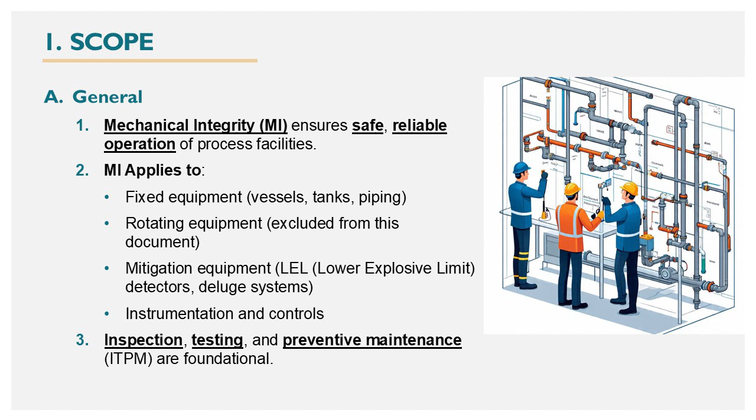The second scope is mechanical integrity or MI applies to fixed equipment, rotating equipment, mitigation equipment such as LEL or lower explosive limit detectors, deluge systems, gas detectors, instrumentation and controls.

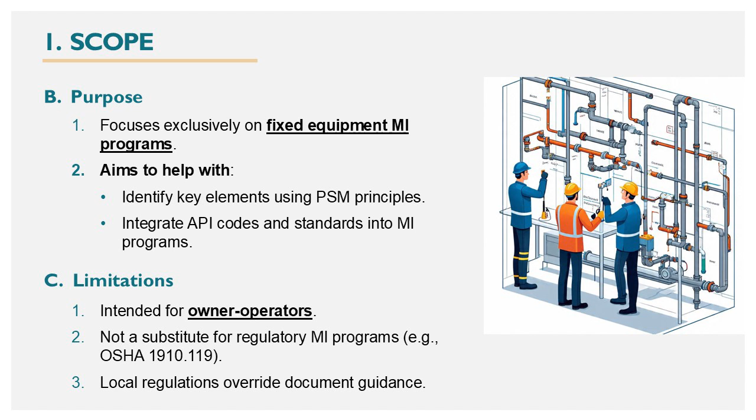Agenda 2, Fixed equipment in a mechanical integrity or MI program. Number A, when applying mechanical integrity or MI to pressure vessels, there are 4 things to be considered, but not limited to the following. Number 1 is construction code of the equipment.

Number 2 is process hazards involved. Number 3 is risk of loss of containment. And number 4 is potential secondary consequences of equipment failure.

Number B, equipment types of fixed equipment covered in an MI program are the following: pressure vessels, storage tanks, piping and pipelines, pressure relief devices or PRDs, fired equipment, critical utility systems, hybrid equipment or fixed other types, and finally peripheral fixed equipment.

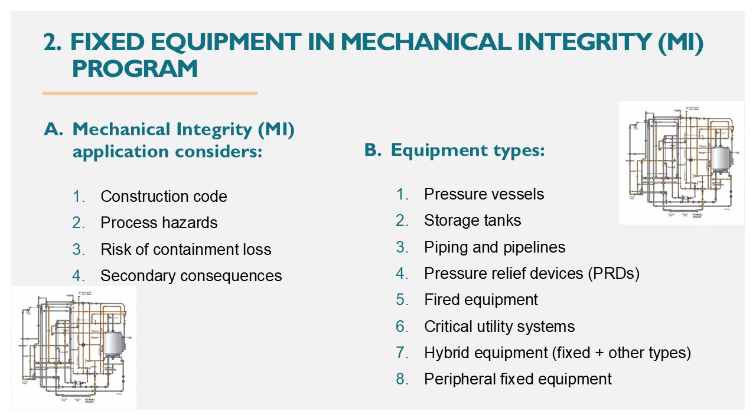Agenda 3, Written Guidance Overview. Number A, generally, in written guidance of mechanical integrity or MI, shall consider the following.

Owner-operators are responsible for developing, documenting, implementing, executing and assessing written procedures for MI throughout the equipment life cycle. Written procedures are essential for an effective MI management system, influenced by industry regulations and standards relevant to the assets used.

Number B, the documentation hierarchy framework includes: Level 1, sometimes called corporate documentations, pertaining to policies, processes, and systems. Level 2, sometimes called cross-site documentations, pertaining to programs. Level 3, also sometimes called site-specific documentations, pertaining to practices and guidelines.

Then another group is task-specific activities pertaining to detailed procedures. For all those documentation, it shall be defined by owner-operators which procedures are needed to meet MI program requirements.

Number C, use of consistent terminology is important to distinguish between required and optional activities. A structured framework shall enable the following.

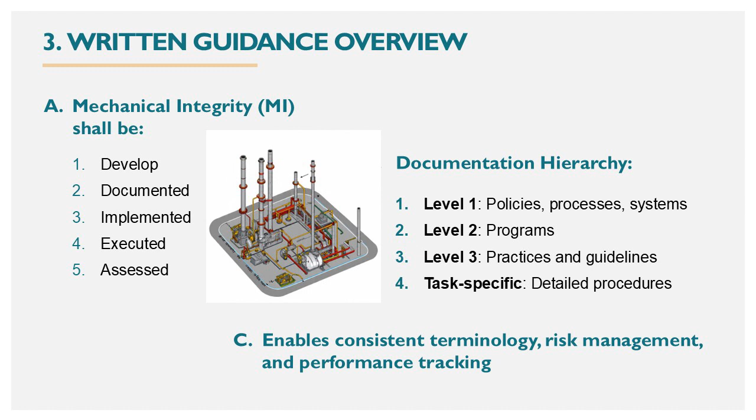The first is clear planning and execution of MI activities across all organizational levels. The second is standardized implementation of risk management strategies. The third is flexibility to address various types and sources of risk. And the fourth is performance measurement and continuous improvement.

Agenda 4, policies, processes, and systems. These elements of a fixed equipment mechanical integrity or FEMI program outline how an organization meets business and regulatory requirements for mechanical integrity or MI.

Often referred to as corporate or Level 1 documents in large organizations. Key components include: Number A, define organizational structure, defines roles, responsibilities, and expectations for MI personnel, ensures independence for those responsible for equipment integrity to raise concerns freely. Some regulations require separation between inspection and operations.

Number B, contractor and supplier expectations, sets quality standards for services, materials and asset quality. Number C, departmental workflows, describes how departments interact and communicate internally and with external agencies.

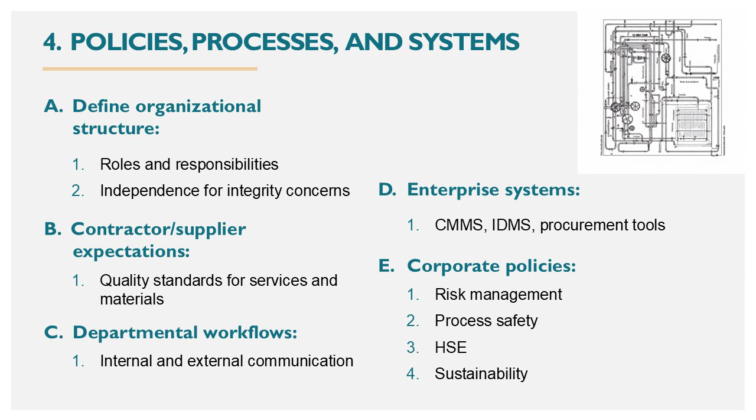Number D, enterprise systems management, covers systems like CMMS or computerized maintenance management system, IDMS or inspection data management system, and procurement tools. Number E, corporate policies, includes policies for system implementation, maintenance, and upgrades. These corporate policies are risk management, process safety, health, safety, environment, and security or HSE, and sustainability.

Agenda 5, Fixed Equipment Mechanical Integrity or FEMI programs. Program documents provide more detail under the broader policies and systems, often referred to as cross-site or Level 2 documents in large organizations, to support Level 1 documents which covered policies, process and systems.

Examples include, number 1 is Detailed Mechanical Integrity or MI programs, for fixed equipment, rotating equipment, electrical systems, and process controls/interlocks.

Number 2 is Supporting programs. It is to ensure mechanical integrity or MI performance is sustainable. Examples: Management of Change or MOC, Process Safety Information or PSI, Operating Procedures, Project Management, Procurement, Emergency Response, Corrosion Management, Condition Monitoring, and Inspection.

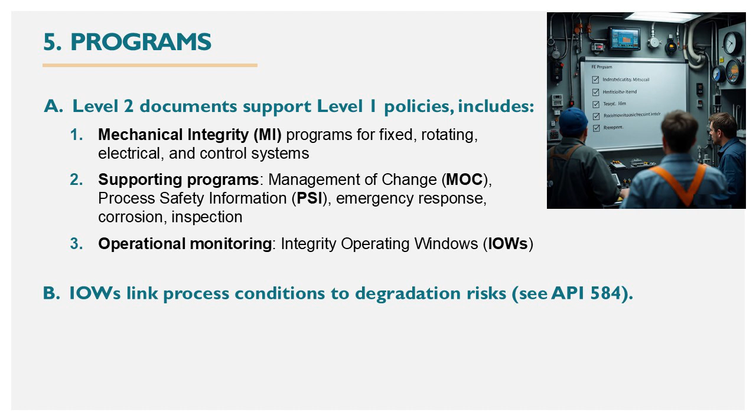Number 3 is Operational Monitoring Programs, to monitor and control process parameters, especially important where integrity operating windows or IOWs are defined. These programs should integrate with mechanical integrity or MI systems. See API 584 for integrity operating windows guidance.

Agenda 6, Fixed Equipment Mechanical Integrity or FEMI procedures. Generally, this procedure is sometimes called site-specific or Level 3 documents. It provides detailed practices and guidelines under the mechanical integrity or MI programs.

Procedure number A, inspection, testing, and preventive maintenance or ITPM procedures. This ITPM procedure outlines strategies for inspecting and maintaining fixed equipment. It aims to detect failure modes and damage mechanisms affecting integrity.

Procedure number B, administrative procedures. This describes how MI-related work is planned, scheduled, and documented. Examples of administrative procedures include, first, using CMMS or computerized maintenance management system, and IDMS or inspection data management systems.

The second is managing work orders. The third is maintaining equipment records and reporting equipment failures.

Procedure number C, safe work practices. This procedure is to ensure personnel's safety during MI activities. For examples, personal protective equipment or PPE requirements, lockout tagout or LOTO, hot work permits, confined space entry and line break procedures.

Procedure number D, general quality assurance or QA procedures. This QA procedure is to ensure equipment meets design and performance standards. This QA procedure covers the following: supplier and contractor selection or audits, project engineering, and equipment construction and maintenance.

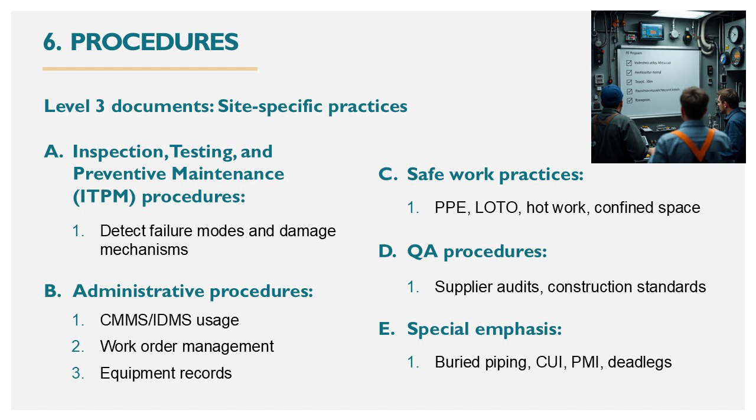Procedure number E, special emphasis program procedures. This procedure focuses on high-risk or problematic areas needing extra attention. For examples, buried piping inspection, corrosion under insulation and fireproofing or CUI and CUF, positive material identification or PMI, dead leg inspection and location of specific damage, refer to API 571.

Agenda 7, Detailed Work Instructions. Generally, this detailed work instruction is a task-specific procedure that guides step-by-step execution. It is to ensure activities are done safely, consistently, and meet program standards.

Detailed Work Instructions number A is Core Maintenance Skill Procedures, for examples, Welding Procedure Specifications or WPS, and Mechanical Joint Assemblies such as ASME PCC-1.

Detailed Work Instructions number B is Inspection, Testing, and Preventive Maintenance or ITPM Task Instructions, for examples, cleaning heat exchanger bundles, chemical cleaning of piping, NDE or inspection techniques, visual inspection of storage tanks, relief valve testing, pressure or leak testing, and procedures for changes in operating status.

Detailed Work Instructions number C is Repair or Replacement Procedures, for examples, welding repairs on piping and vessels, relief valve rebuilds, plugging heat exchanger tubes, and temporary and insulation repairs.

Detailed work instructions number D is troubleshooting guidelines, for examples, root cause analysis flowcharts, corrosion control documents or CCDs, and manufacturer maintenance guides.

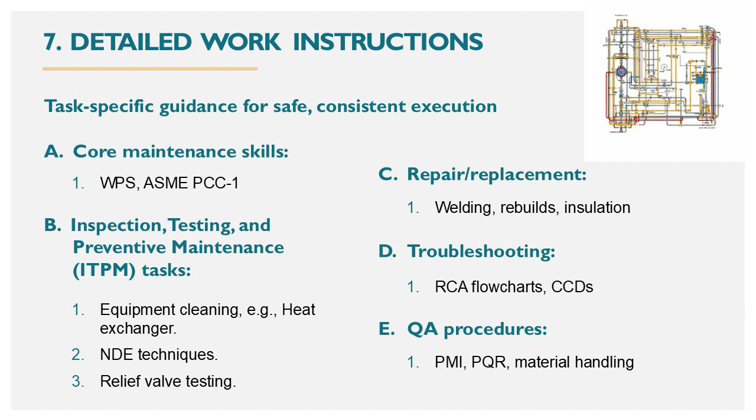Detailed work instructions number E is specific quality assurance procedures, for examples, equipment or material purchasing, warehouse material handling, positive material identification or PMI, and welding procedure qualification records or PQR.

Agenda 8, Training and Qualifications Summary. Number A, in general overview, many roles are involved in mechanical integrity programs. Both employees and contractors must be trained and qualified for their specific roles, and these roles are important throughout the equipment's life cycle. Number B is, contractors and employees must be qualified and experienced.

Practical experience is just as important as formal qualifications. Training programs help keep skills current and adapt to changes. Some certifications require ongoing learning and documentation, and some companies test contractors' skills themselves, especially for tasks like NDE or non-destructive examination.

Number C is local process and safety training. Workers must be trained on the specific units they work in, including understanding processes, damage risks, and hazards. Regular refresher training is recommended. Safety programs should keep workers alert, aware of risks, and ready for emergencies, and training is updated as conditions change.

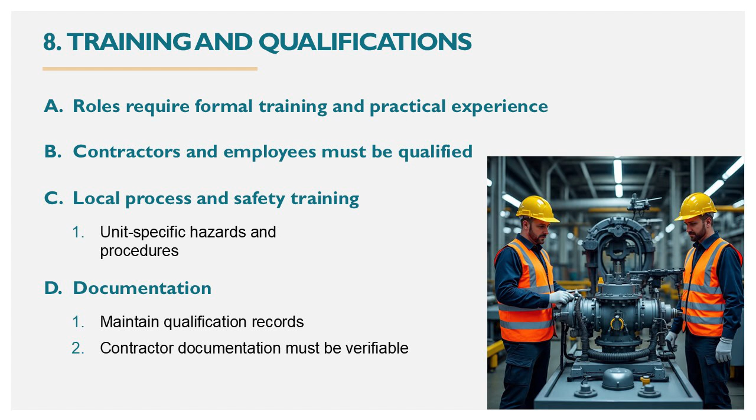Number D is documentation. Companies must keep records of their employees' qualifications. They must also ensure contractors maintain and provide documentation when needed.

Agenda 9, Inspection and Testing. Number A, this is purposed to assess condition throughout lifecycle. Inspections and tests are done to check the condition of fixed equipment throughout its life. A system must be in place to schedule and complete inspections, tests, and preventive maintenance or ITPM to ensure mechanical integrity.

Number B, inspections, tests, and preventive maintenance, or ITPM tasks. ITPM tasks vary based on equipment type, conditions, and regulations. Common tasks include visual inspections, non-destructive examinations or NDE, tests such as hydrotests, leak tests, and preventive maintenance such as coating or insulation repair. The type of equipment determines which codes or standards apply.

Number C, methodology and frequency. Inspection frequency depends on equipment type, damage risks, and regulatory requirements. Three common inspection methods are: time-based, an inspection and testing scheduled using regular intervals; condition-based, an inspection and testing scheduled based on equipment condition; and risk-based, an inspection and testing scheduled based on risk assessment. Different methods may be used for different equipment types. If inspections are delayed, a deferral process must be followed, documenting reason for delay, approval, and new due date.

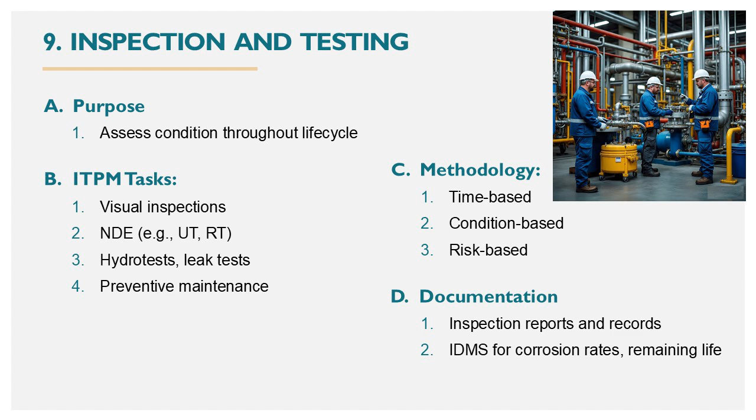Inspection records may also include design and construction info, repair and modification history, fitness for service assessments, and corrosion management data. Agenda 10, Deficiency Management.

Number A, types of deficiencies. Type number 1 is equipment deficiencies, physical issues like damage or wear that exceed acceptable limits or don't meet specifications. Type number 2 is program deficiencies, problems in the MI program itself, such as missed inspections, unqualified personnel, or poor documentation. Deficiency management, Number B is equipment deficiency management process.

Process number 1 is tracking and managing a system, like CMMS or IDMS, used to track deficiencies and ensure repairs are completed. Each deficiency is documented, prioritized, and monitored until resolved.

Process number 2 is identifying equipment deficiencies. Found during inspections, engineering studies, incident investigations, or operator rounds, some issues need expert review to confirm if they are actual deficiencies. Deficiencies can be objective or measurable, such as wall thickness below limit. Deficiencies also can be subjective or based on judgment, such as unusual corrosion pattern.

Process number 3 is following up on equipment deficiencies. Number A, following up by prioritizing and resolving. Follow-up by prioritization is based on risk, severity, repair time, and regulations. Follow-up actions may include repairs such as welding and coating, further inspections, and engineering evaluations such as fitness for service. Follow-up by resolving or temporary repairs, like clamps, must be tracked and replaced before expiration.

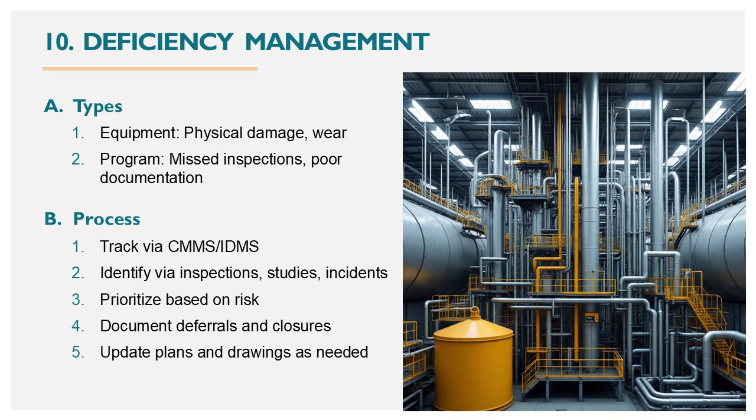Process number 4 is equipment deficiency documentation of closure documentation. All completed actions must be documented clearly. If a repair is no longer needed, a written justification is required. Updates to drawings, inspection plans, and IDMS may be necessary.

Program Deficiency Management, Number A. This program covers the systemic issues that weaken the MI program, such as overdue inspections, poor documentation, inadequate training or testing, missing safety information, weak corrosion or maintenance planning, and poor communication or follow-up.

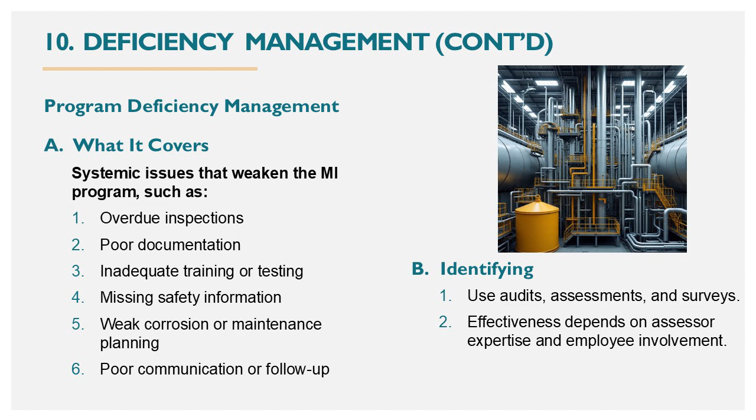Number B, identifying program deficiencies. Use audits, assessments, and surveys. Effectiveness depends on assessor expertise and employee involvement.

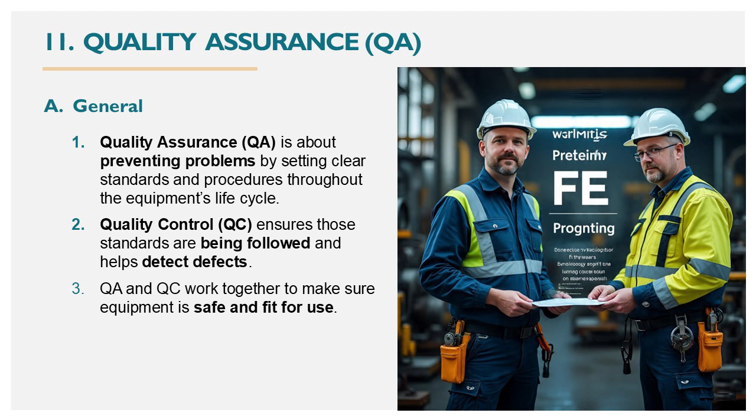Agenda 11, Quality Assurance, or QA. Number A, general overview of QA. Quality assurance, or QA, is about preventing problems by setting clear standards and procedures throughout the equipment's life cycle. Quality control, or QC, ensures those standards are being followed and helps detect defects. QA and QC work together to make sure equipment is safe and fit for use.

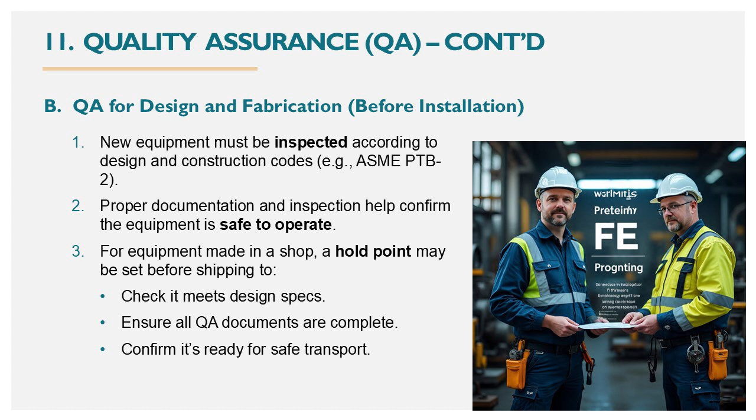Number B, QA for design and fabrication, or before installation. Number 1, new equipment must be inspected according to design and construction codes such as ASME PTB-2. Number 2, proper documentation and inspection help confirm the equipment is safe to operate. Number 3, for equipment made in a shop, a hold point may be set before shipping to check it meets design specs. Ensure all QA documents are complete. Confirm it's ready for safe transport.

Number C, QA for receiving, storage, and retrieval.

QA procedures help ensure equipment is correctly received, matches the order, is undamaged, and is properly stored, such as dry conditions for welding materials, isolated to avoid contamination, accurately retrieved for installation with the right items, and handled properly.

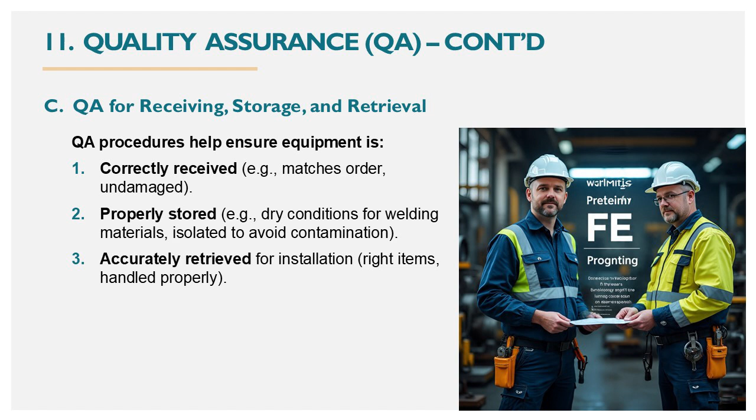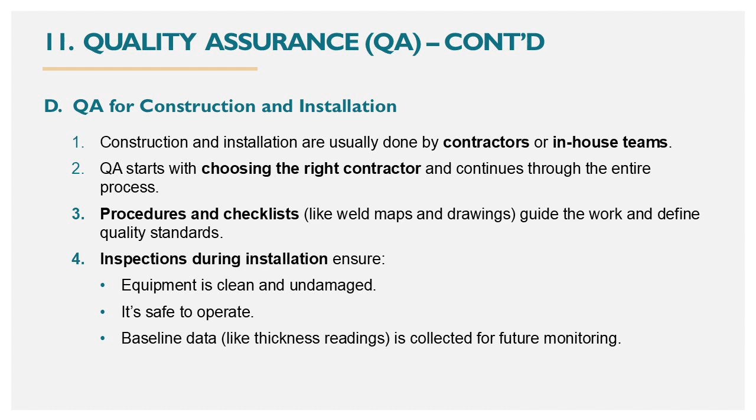D. QA for construction and installation includes: construction and installation are usually done by contractors or in-house teams. QA starts with choosing the right contractor and continues through the entire process. Procedures and checklists, like weld maps and drawings, guide the work and define quality standards. Inspections during installation ensure equipment is clean, undamaged, and safe to operate. Baseline data, like thickness readings, is collected for future monitoring.

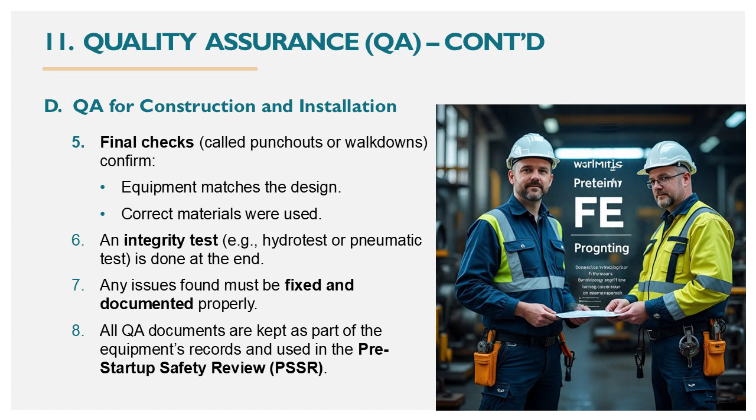Final checks, called punch-outs or walk-downs, confirm equipment matches the design and correct materials were used. An integrity test such as hydrotest or pneumatic test is done at the end. Any issues found must be fixed and documented properly. All QA documents are kept as part of the equipment's records and used in the pre-startup safety review, or PSSR.

E. QA for in-service inspections, repairs, alterations, and re-rating. QA continues during repairs, inspections, and modifications. Contractor selection and NDE equipment calibration are important.

Repairs must follow the original design code or a relevant repair code, with a repair plan made by a qualified inspector or engineer. All work must be authorized and approved as per the code. An inspection and test plan is created for each repair or alteration. All activities are fully documented to ensure the equipment remains safe and compliant.

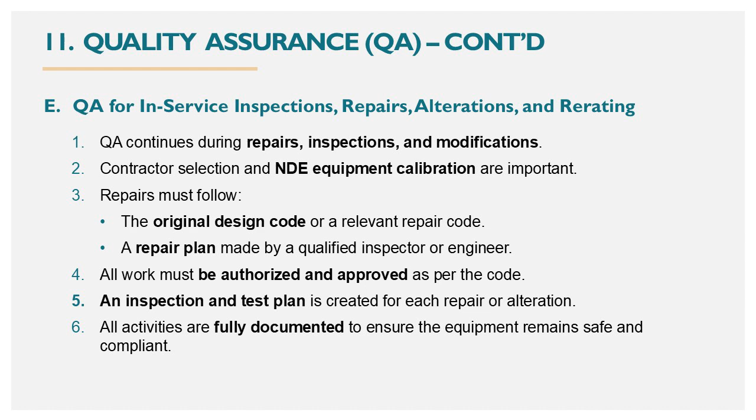F. QA for temporary installations and repairs. Temporary repairs, like lap patches or sleeves, follow different standards than permanent ones. ASME PCC 2 provides guidance for these. Companies must have a clear policy to manage temporary fixes and avoid serious risks. This policy should be part of the Management of Change, or MOC, process.

Check if operating conditions or procedures need updates, and ensure staff are informed of changes. Temporary repairs usually have an expiration date and must be reviewed or replaced before that date.

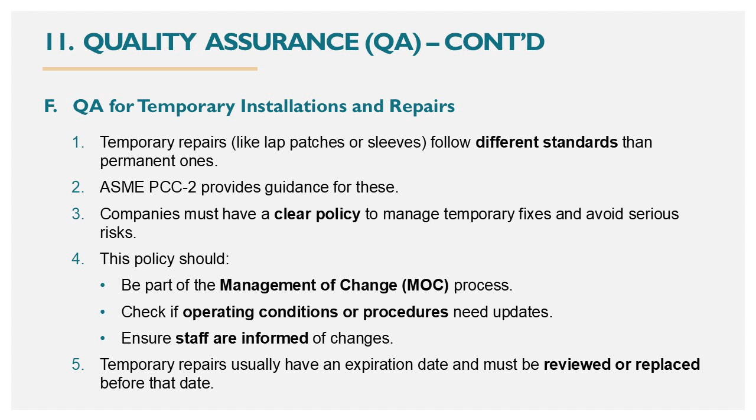G. QA for reuse of decommissioned or purchased equipment. Reusing equipment requires QA procedures to ensure safety and reliability. Keep all design and inspection documents organized. When moving equipment, use proper labeling and tagging.

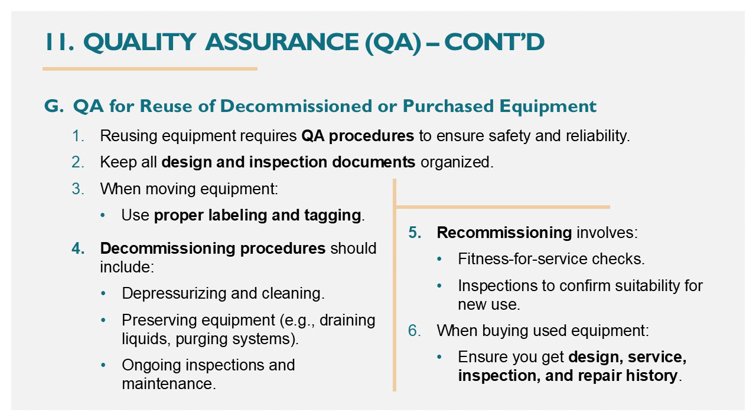Decommissioning procedures should include depressurizing and cleaning, preserving equipment such as draining liquids, purging systems, and ongoing inspections and maintenance. Recommissioning involves fitness for service checks and inspections to confirm suitability for new use. When buying used equipment, ensure you get design, service, inspection, and repair history.

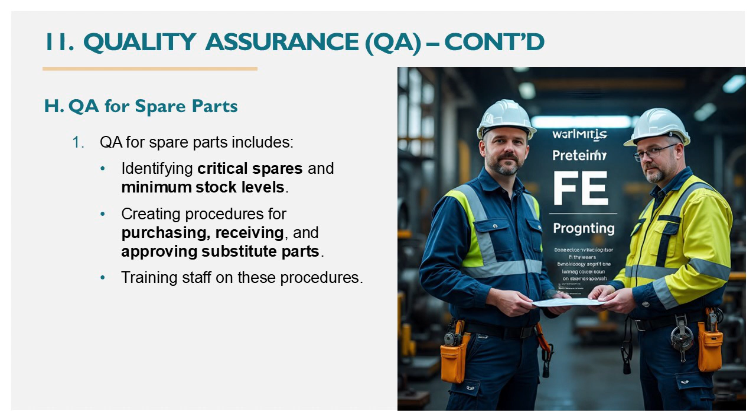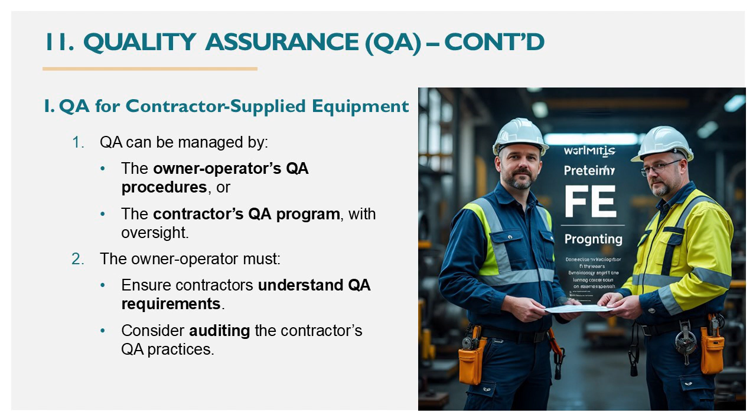I. QA for contractor-supplied equipment. QA can be managed by the owner-operator's QA procedures, or the contractor's QA program with oversight. The owner-operator must ensure contractors understand QA requirements, and consider auditing the contractor's QA practices.

Agenda 12: Roles and Responsibilities Associated with Mechanical Integrity, or MI. Different departments, like operations, maintenance, engineering, and process safety, all have specific responsibilities in the MI program. Leaders, site leaders, managers, and supervisors are responsible for assigning resources and making sure the MI program is carried out properly. The exact roles may vary depending on the company's size and structure, but every responsibility must be clearly assigned to someone.

The organization should allow people involved in MI to raise concerns independently if they notice any equipment integrity issues. In some regions, inspection and operations roles must be kept separate to ensure unbiased decisions.

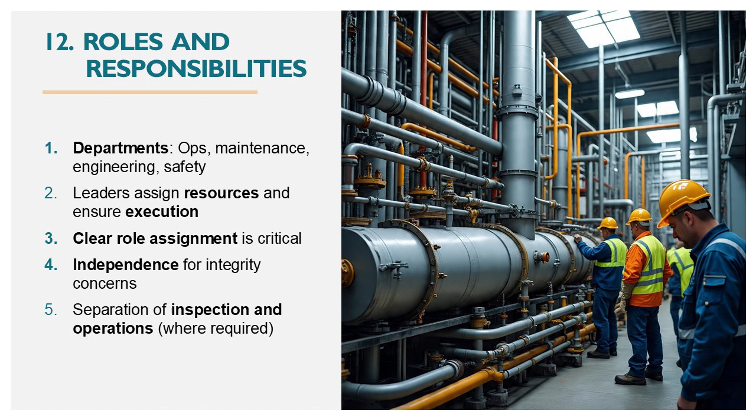Agenda 13: Process Safety Information, or PSI. A. Generally, PSI is defined as part of Process Safety Management, or PSM, and includes details about process technology and equipment. For fixed equipment, or FE, PSI refers to design documents, drawings, and specifications. PSI is grouped into 3 categories.

Category 1: chemical hazards, such as safety data sheets. Category 2: process technology, such as process chemistry. Category 3: equipment details, such as design codes and materials. PSI for FE is essential for planning inspections, methods, frequency, and repairs.

B. PSI Management Program. A program is needed to obtain, organize, and maintain PSI for FE. Key components in the PSI Management Program are, number 1...

Ensure PSI is retained for new or replaced assets. Use quality control and PSM processes, like MOC or PSSR, to verify documents. Organize files by unit or asset, which includes the document handoff process.

Define what documents to share, in what format, and when, especially between departments. Also, update PSI after changes. Any modification, repair, alteration, or re-rating must be reflected in updated PSI.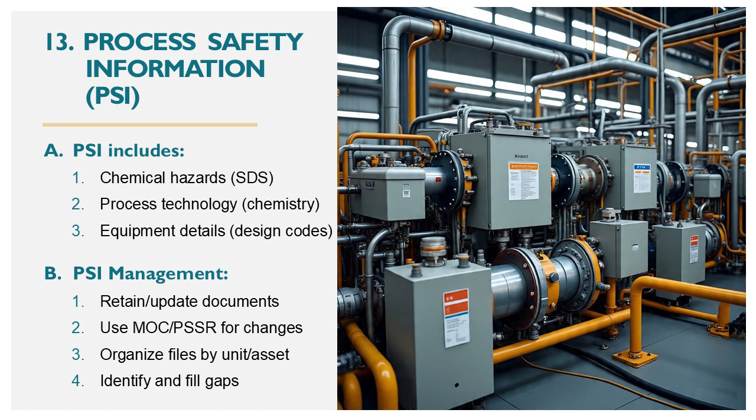Agenda 14, Repair Organizations. Qualified repair organizations must be certified, different from manufacturers or fabricators. Manufacturers build new equipment and get certifications like ASME or API. Repair organizations work on existing equipment and also need certifications.

For repair organizations, importance - why they matter: first, legal compliance, repairs must meet strict regulations. Second, safety, ensures equipment operates safely after repair. Third, quality assurance, certified organizations follow strict quality standards.

Fourth, insurance, insurers often require certified repairs. Fifth, technical conformity, repairs match original design. Sixth, documentation, certified repairs include proper records for compliance and liability.

Repair stamps: certified organizations can stamp repaired equipment to show compliance. Individuals with code certifications cannot stamp equipment.

Common National Board of Boiler and Pressure Vessel Inspectors or NBBI stamps include: R stamp, for repairs or alterations on pressure vessels, boilers, heat exchangers, and tanks. VR stamp, for repair or testing of pressure relief valves. HVR stamp, for heating boiler repairs. Always check the latest standards for updates.

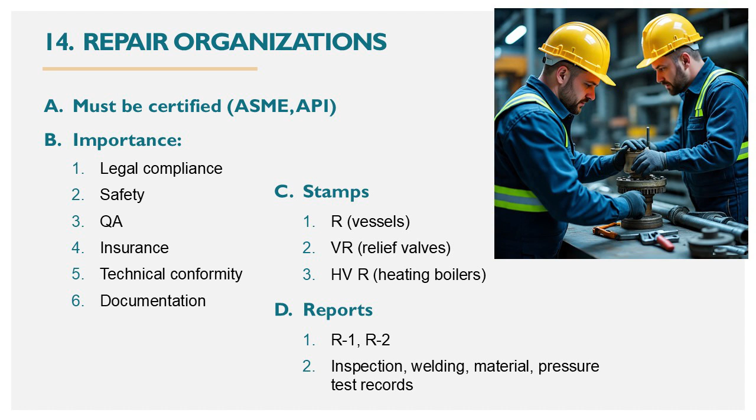Material certifications ensure traceability and compliance certificates. Pressure test records include hydrostatic or pneumatic test results. Repair process documentation covers procedures, deviations, and approvals. The manufacturer's data plate should be updated if required. Regulatory approvals - keep all required permits and approvals.

Agenda 15, Pre-Startup Safety Review or PSSR. Generally, PSSR, also called Operations Readiness Review, is part of the Process Safety Management or PSM program. For Fixed Equipment Mechanical Integrity or FEMI, PSSR ensures all MI requirements are completed before startup. PSSR applies after new installation, repair, or re-rating, and after shutdown before restarting.

The description of PSSR is as follows: it is a quality assurance review to confirm equipment meets design requirements for intended service, all documentation is updated and stored in the right systems, and procedures and training are updated.

PSSR also covers the need for any issues listed in a punch list to be prioritized as must-fix-before-startup or can-fix-after-startup, with assigned responsibility and timeline.

Checklist item 1 is design compliance - a site-specific checklist used to confirm readiness, involving authorized personnel from all affected departments. Checklist item 2 is documentation.

Documentation involves updating asset files with new info and archiving old data. This may include updates to operations, maintenance, and emergency procedures; process inventory lists; CMMS and/or IDMS databases; relief valve programs; and DCS screens and other site systems.

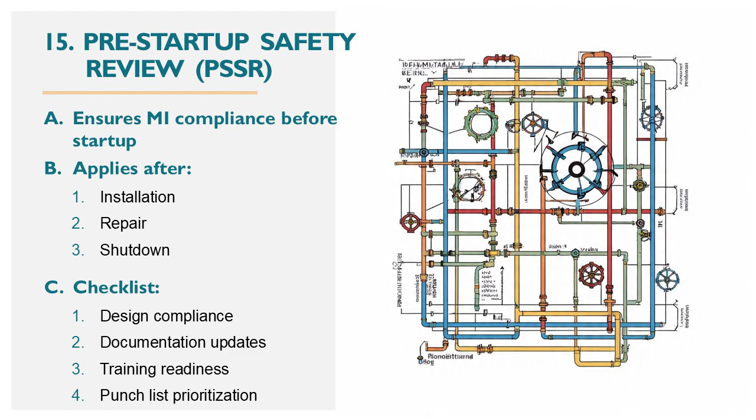Checklist item 3 is training readiness, and checklist item 4 is punch list prioritization. Agenda 16, Management of Change or MOC - generally, MOC is part of the PSM program.

For fixed equipment mechanical integrity or FEMI, all significant changes to processes or equipment must be reviewed, approved, and PSI updated before implementation. Poor MOC can invalidate hazard assessments or compromise safety layers.

Number 2 is initiate for equipment, process, procedure changes by creating an MOC process. Owner-operator must create a formal process for documenting, tracking, and training on MOCs, and ensuring proper updates to documentation.

Then we need to know when to initiate MOC. We must start MOC for any change in process chemicals, technology, equipment, or facilities, for example adding, removing, or modifying equipment or piping, changing process conditions or composition, updating operating procedures, or any change requiring process safety information or PSI update.

Number 3 is review and approval. MOC review is done by a multidiscipline team. Number 4 is MI personnel must check for unintended consequences such as increased flow causing vibration and damage.

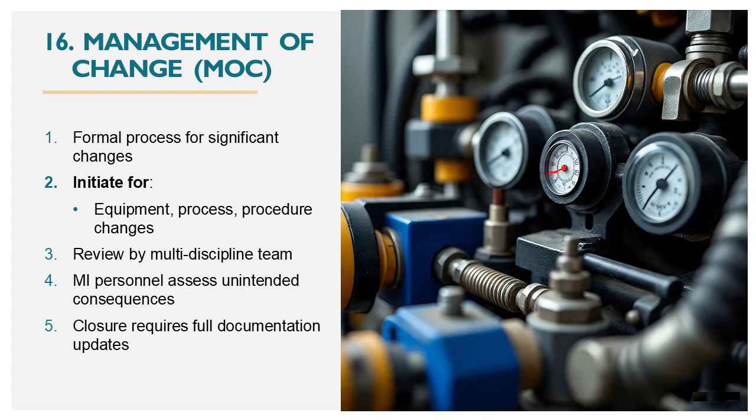Number 5 is documentation and closure: update equipment files after changes to ensure correct spare parts. This update is to match replacements to actual equipment and keep MI inspection records accurate. MOC cannot be closed until all records and MI program elements are updated.

Agenda 17, Integrity Operating Windows or IOWs, Number A. Generally, integrity operating windows help monitor process conditions that affect the integrity of fixed equipment or FE. They link operations monitoring with the mechanical integrity or MI program. Integrity operating windows purpose to detect when operating conditions accelerate equipment degradation.

Number B. Integrity operating windows are different from safe operating limits or SOL. Safe operating limits focus on safety such as overpressure, and integrity operating windows focus on material degradation and long-term integrity. The correct integrity operating windows make degradation predictable and manageable through inspections.

Number C. Establishing limits or integrity operating windows. These are the steps to establish the limits. Number 1, define process design conditions: pressure, temperature, pH, material, etc. Number 2, identify damage mechanisms, refer to API 571.

Number 3, set limits for process variables where degradation accelerates, considering all operating scenarios: normal, startup or shutdown, abnormal conditions. Group similar equipment for common IOWs; unique cases get individual limits. Limits should be conservative based on risk. Use API 584 for risk ranking and guidance.

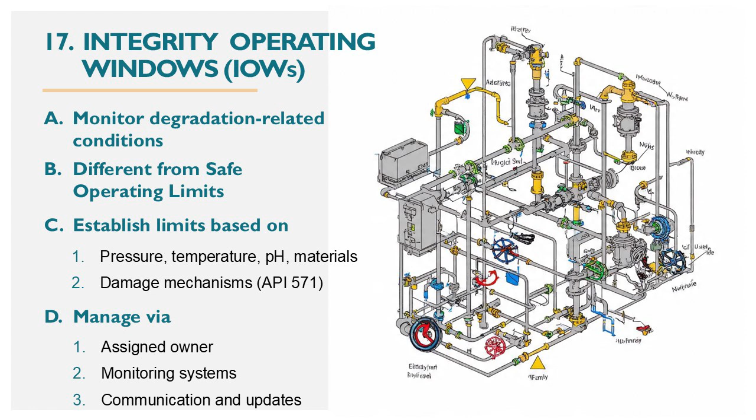If a limit or integrity operating window is exceeded, notify the corrosion specialist and inspector, then assess impact and perform extra inspections if necessary. Next, update IOWs when equipment design or operating conditions change, using the MOC process.

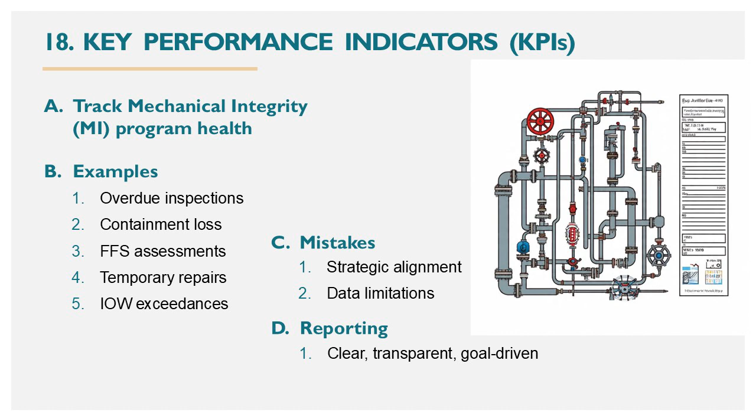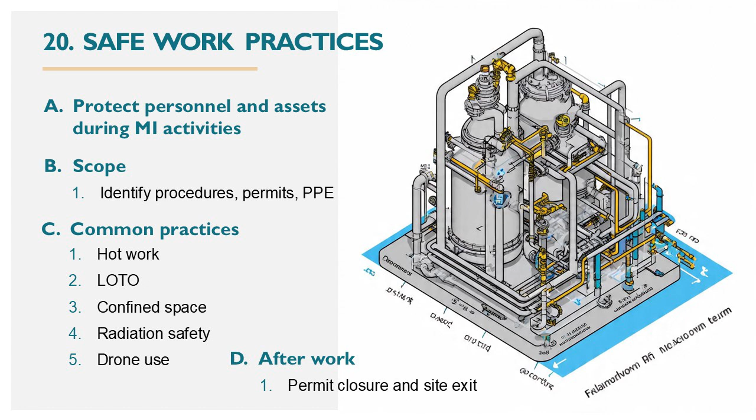Agenda 21, Inspection Data Management Systems (IDMS), Number A: generally, IDMS are digital systems that organize, store, and analyze inspection and integrity data. They support compliance with regulations and data-driven decisions for maintenance, repair, and replacement.

Number B, benefits: centralized data storage avoids scattered data sources and inefficiencies, enables historical analysis, trend identification, and predictive maintenance, and supports easy reporting and analytics while handling large data volumes.

This requires clear protocols for data entry, labeling, and verification. Data integration combines data from multiple sources, such as NDE tools and monitoring systems, for a complete picture, enabling risk-based inspections and targeted maintenance.

Number C, roles and responsibilities: inspectors input real-time data, engineers or managers analyze data, identify trends, and make decisions, and compliance managers track regulatory adherence.

Number D, types of IDMS: specialized systems for NDT data, integrated systems with enterprise tools such as CMMS, and cloud-based IDMS for remote access.

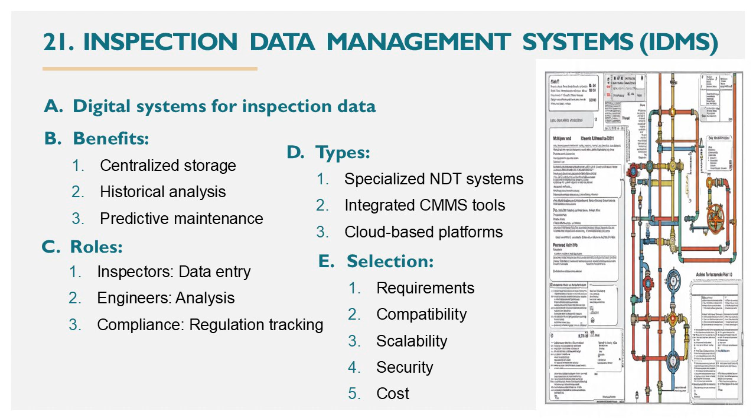Agenda 22, Managing Codes and Standards Updates, Number A: generally, codes and standards are updated regularly, such as every 2 to 5 years, by organizations like API. Number B: updates may change requirements and affect compliance, such as a change from 'should' to 'shall'.

Number C: owner-operators must have a standards management process that includes identifying applicable codes and standards, periodically reviewing updates from publishing organizations, and updating internal policies and procedures to stay compliant.

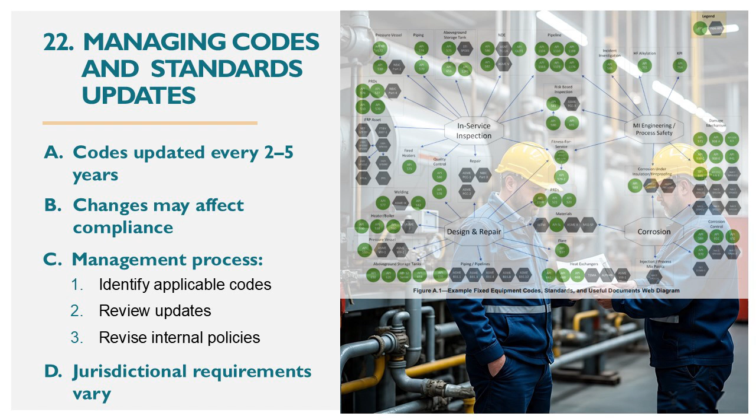Number D: jurisdictional requirements vary in terms of selection, application, and revisions. Applicable codes depend on jurisdictional requirements at the city, state, or federal level, and authorities may adopt specific codes and enforce them through permits and inspections.